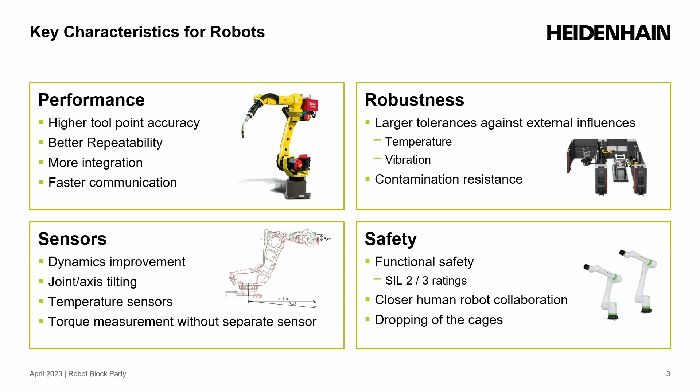And then helping to support all that are also the sensors. This is where our encoders also come in, and I'll get to that in a second. But you have other sensors too that are being integrated—things to help with the dynamics, torque sensing, joint and axis tilting, temperature sensors to make sure that your components aren't overheating. All of those are going in and basically providing more and more information for the robot to be able to draw from.

And then finally, the big thing is safety. So a big trend that we're seeing in the robotics industry is historically you would have these large industrial robots. You think of something like an automotive manufacturing plant or welding. You'd have these large robots operating in very restrictive spaces or in cages basically. So anytime anybody entered that space, the robot would have to shut down because you don't want to risk injuring your workers. You want to be able to make sure that there's no possibility of a potential failure.

As we move forward, we want robots to actually work collaboratively with humans. You want to be able to have a human worker directing and working with a robot as it does the task that it's involved with. So this is where things like cobots or collaborative robots come into play. But as you work with humans, you also need better safety. You need better redundancy to make sure that the robot isn't going to suddenly move or have any sort of reaction that could potentially harm the individual that it's working with.

So we're moving towards dropping those cages, but ensuring the safety of those workers with the robots as well. These main four things drive a lot of the industry forward, but also drive for us as a component of robots how we develop as well.

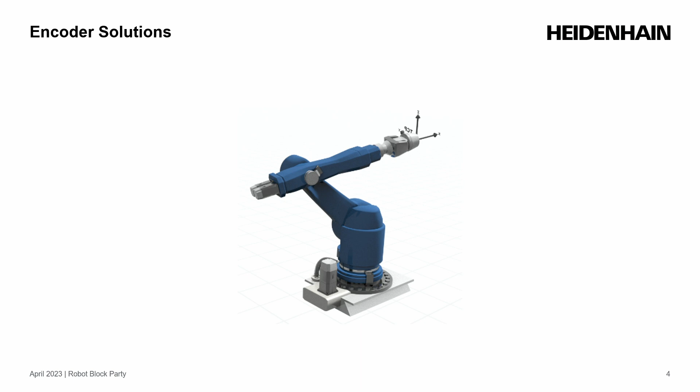Within a traditional robot arm, what our company focuses on is basically the component inside of the robot. So we do a lot with internal motor feedback. The motor that's driving those joints and the overall movement, we're providing feedback on the speed with our encoders. We're also doing internal joint positioning, so as you have movement, you want to know exactly where you are down to arc second level, which is basically 3600th of a degree - really small increments within those rotary positions.

And then also the communication between those, right? So you have all these different sensors, all these different inputs coming from different levels of the robot, and you need to standardize and have a solution that brings that information back so that you don't have hundreds of different wires being routed through your robot overall. Our company, Heidenhain, focuses on trying to improve each of these elements and provide the best solutions for the next age of robotics going forward.

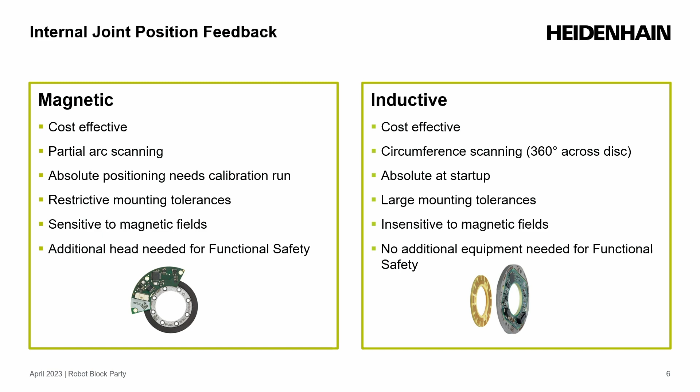They're also insensitive to things like magnetic fields, which would affect a magnetic encoder, and absolute at startup. So right away, if you power cycle your robot or if it turns off, right when you start up, you know exactly where you are because every single positioning on this encoder has a very unique code. So even if the robot moves or something knocks into it, it still knows exactly the positioning that it's going to.

So we've seen a really big trend towards the inclusion of these within more and more robot designs. We're seeing a lot of integration due to the ability to handle even things like contamination and the no calibration aspect.

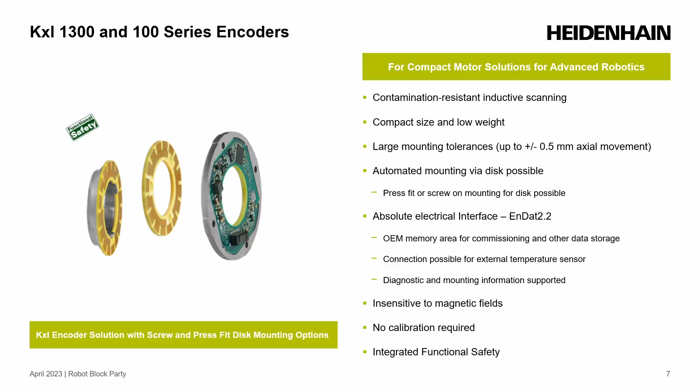And then we also see things related to functional safety. We talked about that portion with the safety control. With functional safety, you get basically a safety integrity level - you can go 1, 2, or 3. And what you need in order to reach those higher levels is to develop things like redundancy. So with our encoder, you actually can develop 2 independent positions that can compare to each other. That makes sure that if there's any slippage or anything going on, your encoder knows exactly where it's at and what's going on, so you don't have any situation where it could potentially harm an individual.

So with that solution, we were basically looking at what exists and how can we improve upon it. But our company likes to also try to do more innovative things to push the market forward as well. And so that's where we come up with a solution for a 2-in-1, taking the motor feedback and the joint positioning and putting it together.

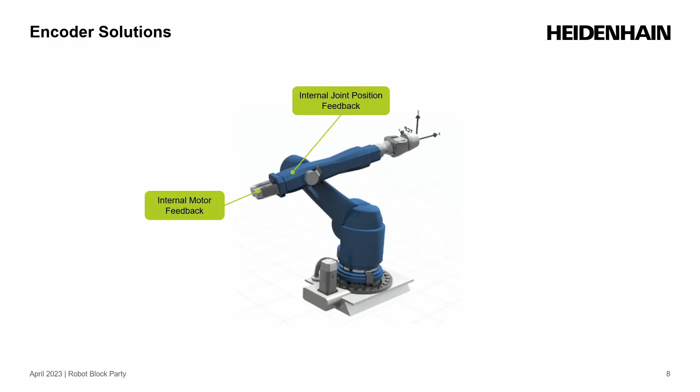So I got a little video here. Let's see if it works.

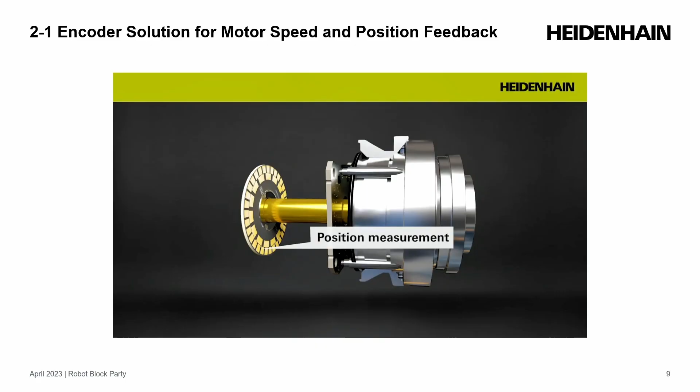So this is what you would see as a typical joint within a robot. What we've done is actually take the motor feedback on the backside of this encoder and then have the gearing on the back of the joint coming through, and then having positioning on the other side of the output shaft. So instead of having 2 independent encoders within a solution, you can combine it into one and reduce your overall cost, reduce your overall size, all while eliminating backlash error, zeroing error, all these things that contribute to inaccuracies within a robot development.

So as we talked about, you're trying to improve the performance. These solutions provide that all while providing an advantage on cost and sizing as well.

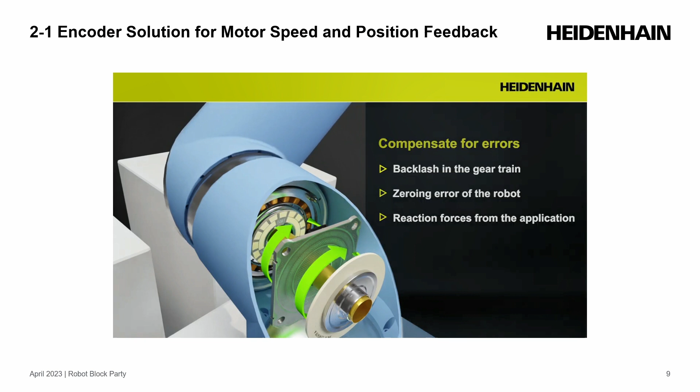So as kind of a cut up, you can see here the design from a basic standpoint. You have the motor over there driving the overall joint, and then you have the gearbox on the back side that then drives the output shaft, which is connected to the back end of the encoder. So there's a ton of advantages that come from this, both from the cost and the sizing standpoint.

But one thing that we've actually just started getting into is actually the ability to take both of those measurements and actually do torque measurement from it as well.

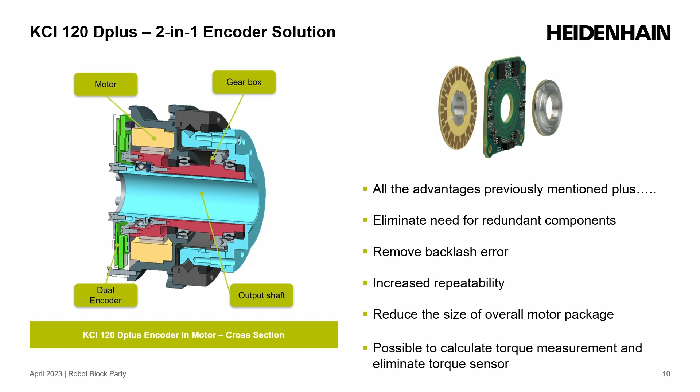So a lot of robots have functionality like safe torque off or safe torque functionality for safety as well. And a lot of the time you have to integrate a separate torque sensor into the system in order to do that.

And so this is, again, another advantage, another cost saver with using the solution to drive the industry forward.

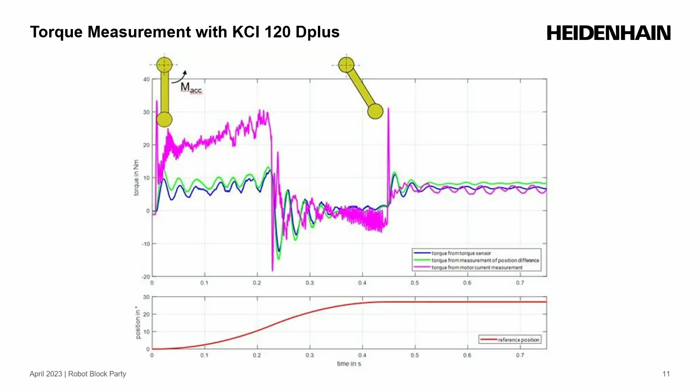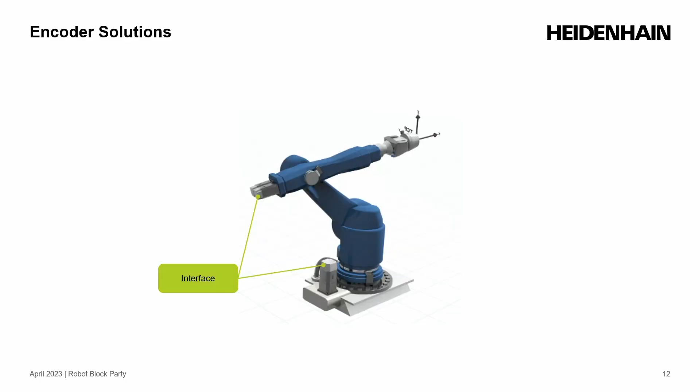And then the last thing I'm going to talk about is interface. So this is the connective tissue that brings everything together. This is basically the language that all of these components use to talk to the main computer of the robot.

And so for us, we have an interface called EnDat, which stands for encoder data. We've had a lot of iterations of EnDat over the years, starting actually back in 1993, so basically as old as me, and then having generational iterations going beyond that as well. And so our latest version is actually EnDat 3.

And the big advantage for EnDat 3 is actually providing more communication capability, more sensor integration, all while providing a reduction of overall wires and a reduction of overall cost with a single cable solution.

So with the EnDat 3 features, we have universal compatibility across all of our encoder brands, various scanning, various sizes, measuring principles, and things like that. And then also integration of other sensors.

You'll see out in the showroom out there, there's a lot of different companies doing things like force sensing, temperature sensing. We even have some like vibration sensing stuff. And all of that can actually be integrated within the EnDat stream so that instead of having multiple wires coming back, it can be just over one cable communication.

It's extremely fast. You can go up to 25 megabits per second, even going into very long cable lengths, and then also providing diagnostics so that you can understand what's actually going on in my system, how is it working, and what is the overall current health.

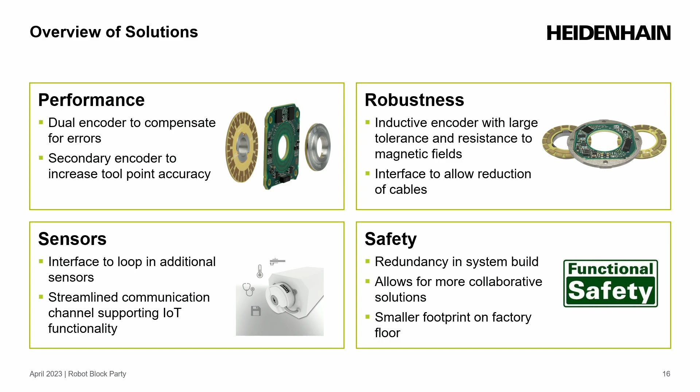So yeah, that is the conclusion of my presentation. If you guys have any questions, please let me know, but thank you for your time. Appreciate it.